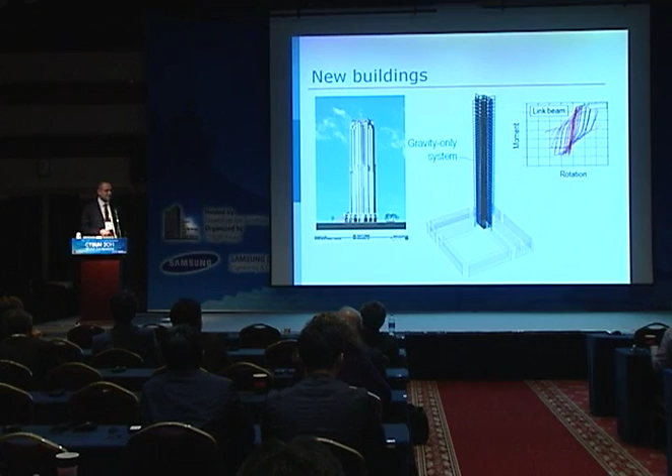The idea there was to start to really challenge the prescriptive language that was in the code, because it was recognized that the building designs that these prescriptive code languages were yielding weren't really user-friendly or architecture-friendly, or in fact, they didn't even perform very well from a seismic point of view.

So there was a series of guidelines that were developed in the late 2000s: the City of San Francisco, the Structural Engineers Association of Northern California, the Los Angeles Tall Buildings Council, and here you see the Council on Tall Buildings document in 2008 that was developed.

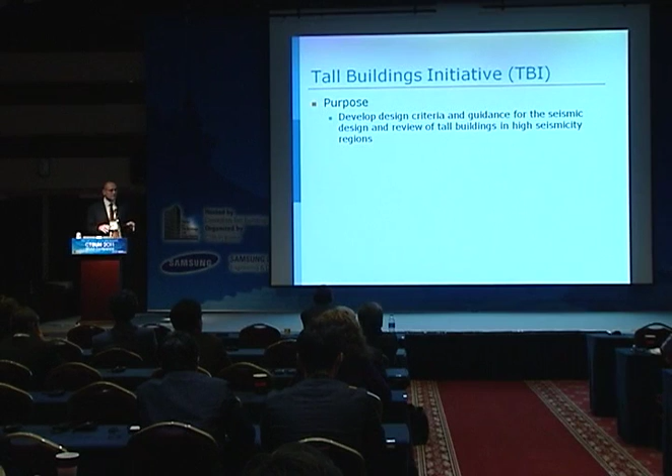The Tall Buildings Initiative was a funded effort, funded by a variety of organizations, but the idea was that there was this kind of mishmash of activity going on in the world with regard to the design of tall buildings in high seismic zones. There was a strong desire to pull this together into something more thoroughly thought through, so that there was a beginning and an end and a purpose and a storyline to be told in the design.

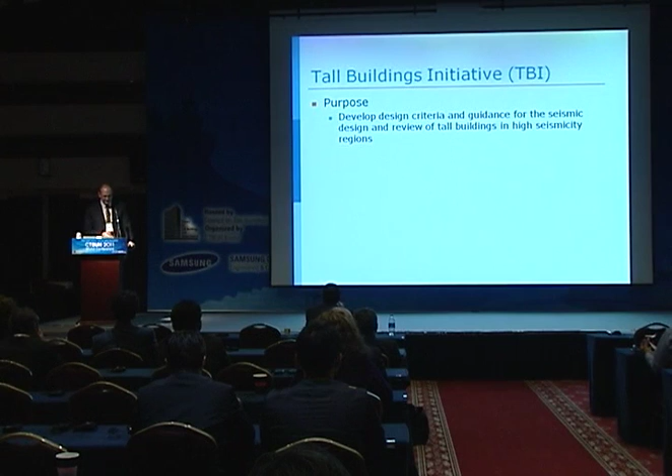At any rate, the contents of this particular guide here, you see the chapters from introductory comments, but then it gets into very specific definition of ground motions, preliminary design, service level evaluations, maximum considered earthquake evaluations, and the like.

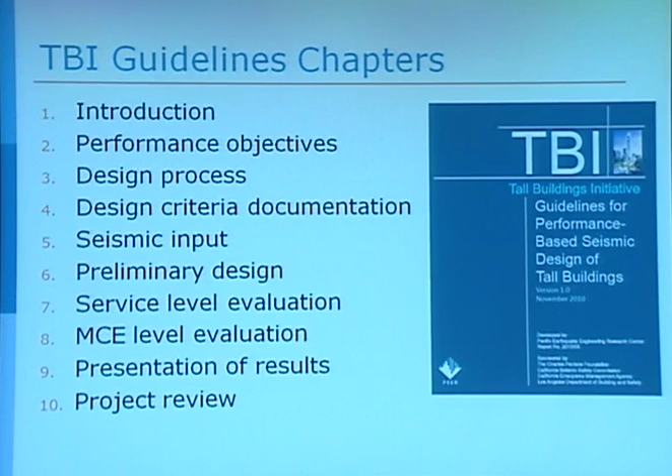Back in the 1990s, there was this fairly well-recognized table that was put together by the Structural Engineers Association in California, and it really kind of summarized the basis of the desire, if you will, what the building code was endeavoring to do.

As many of you know in North America, how the building code still is written is we're basically targeting a life-safe objective under a 500-year event. But because practice up until recently was unable to really go at this demand level very directly due to our constraints of analysis, et cetera, we'd take this demand level of 500 years, divide it by a response modification factor to bring it down to some elastic level that we could actually analyze and design our buildings with.

And the hope was that then through detailing, somehow magically, we would satisfy a service level criteria, and we'd also satisfy a collapse prevention criteria. It was really more of a hope and a prayer. It wasn't really a rigorously demonstrated performance. It was really more anecdotal performance, if you will.

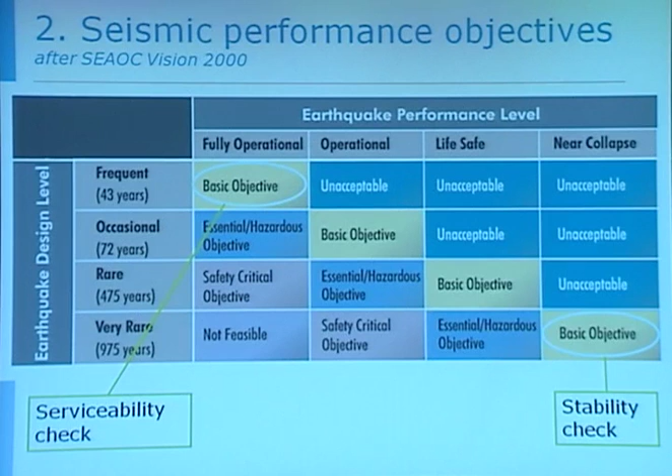Essentially we don't want the building to fall down. And what happens in between is really difficult, frankly, to assess and predict. So we focused on defining the demand levels and the acceptance criteria for these two bookends. And that's what this document defines in great detail.

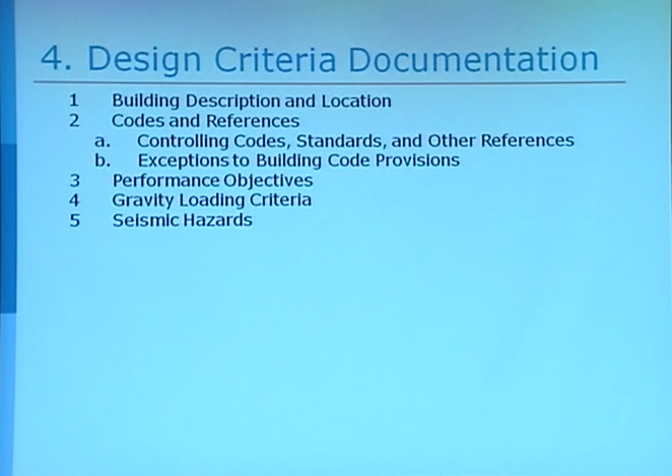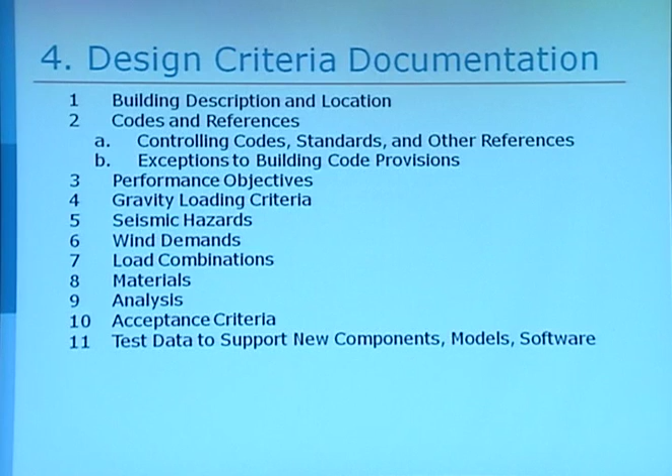One of the things that I'd say is actually fairly poorly done, frankly, in the engineering community, from my experience at least, is that when you go to design a building, to actually write down ahead of time what it is you're going to do in terms of your criteria, your procedure, your approach, and to actually communicate this not only to yourself and to your staff internally, but to communicate that to the external world, whether it's a building official or in many cases in tall buildings, peer review panel.

So included in this guideline are specific recommendations on what should be included in such a document. If you're going to communicate in particular to the outside world in the form of a peer review panel, what types of information should you include and how should it be organized and conveyed?

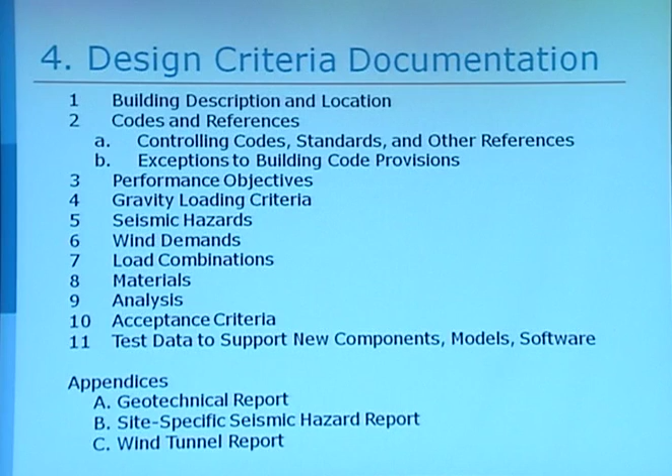Ground motion selection, of course, is really important. The recommendations given in this guideline suggest that when we're looking at tall buildings, as a minimum we ought to be considering a suite of 7 ground motions, particularly in nonlinear response history analysis, and that defining those ground motions should be done either via spectral matching or spectral scaling.

I caution everyone that there are hidden bumps in the road with both approaches, spectral matching and spectral scaling. If you do spectral matching, the question really is how much real variation in ground motion are you getting, and how well are you really testing your building? In spectral scaling, if you scale your spectra to the first mode period of your building, you may find great surprises in the second and third mode.

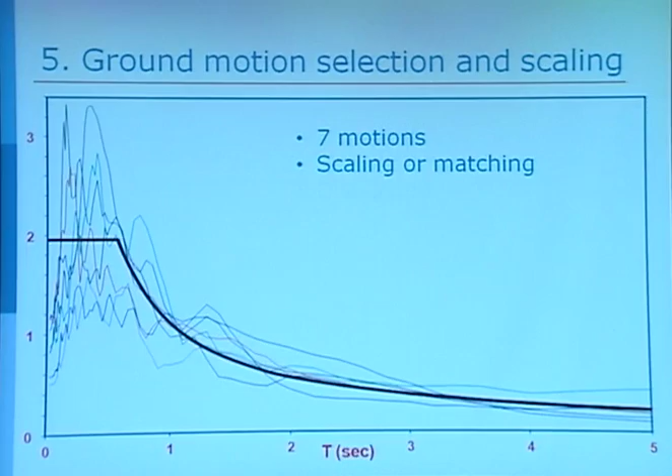The dispersion of the results is very important to consider and try to understand what that means to the detailing of your design. More recently, there's been a push to use what's called a conditional mean spectra approach, where you use suites of ground motions targeting your first 3 or 4 modes of vibration. This is a really interesting approach academically speaking. The difficulty is there isn't much historical design information to go by, so it's a bit experimental still at this stage.

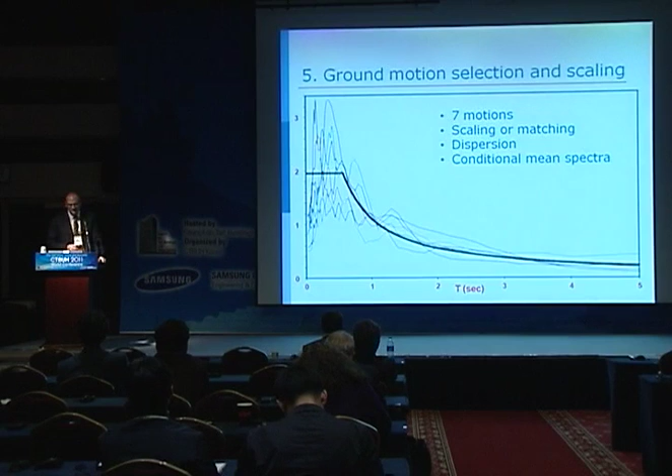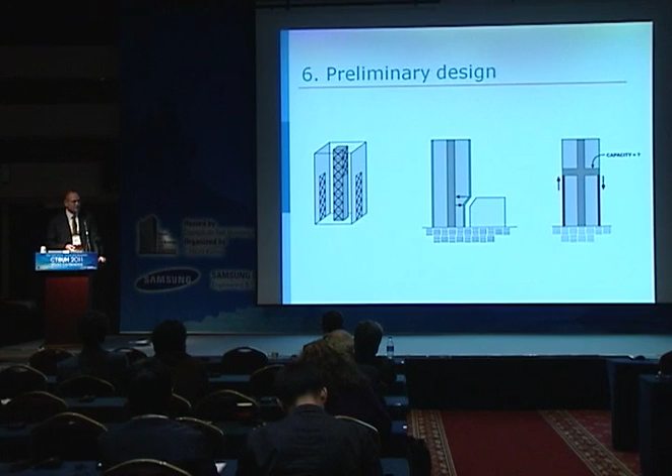The guideline then goes into some preliminary design suggestions, and in particular points out things that you should think about and be careful with. Our last presenter talked about outriggers. You see here in this particular diagram that remains a question, and you need to be particularly careful there.

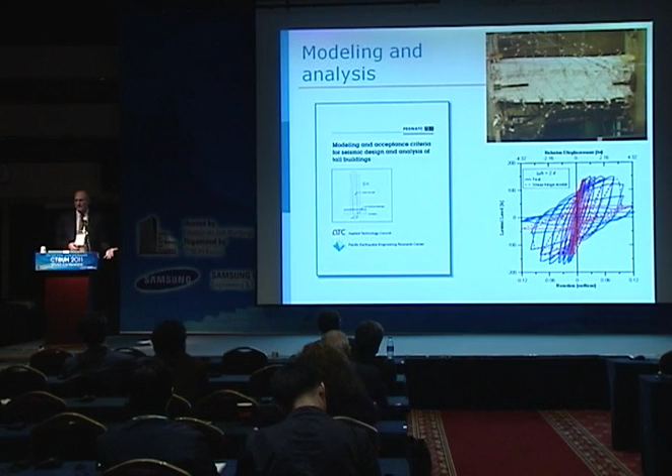The document also talks about modeling and analysis. It goes into great detail on how you should model the building, what should be included, what stiffness values should be assumed, et cetera. It's in great detail on how the model in fact should be built.

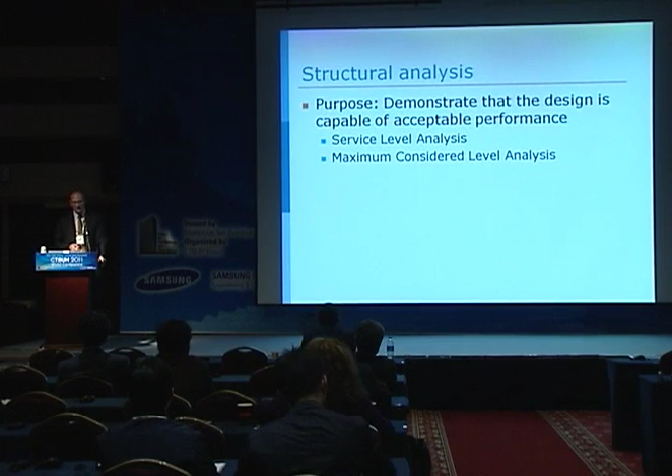When we get into the structural analysis, we're looking primarily at 2 levels, like I mentioned: a service level analysis and a maximum considered level analysis.

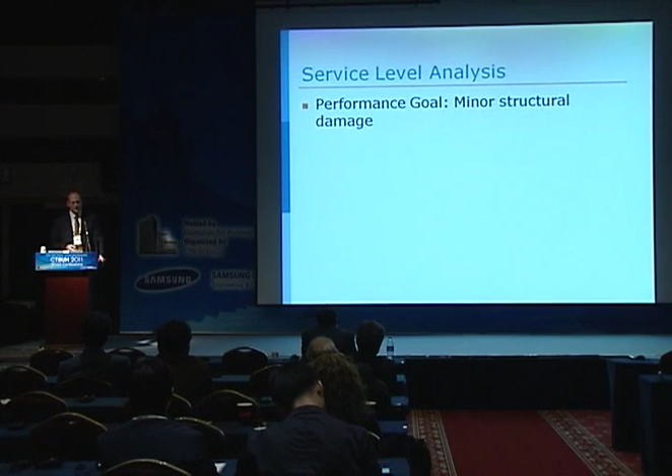At the service level, what we're seeking to do is really have little to no damage. The model should comprise all the components of the building, and again, we're modeling this to try and predict the actual response of the building. So unlike the past, where perhaps you were using design material properties and conservative assumptions in your model, at this stage of the game, we're trying to actually model what we expect the building will really do.

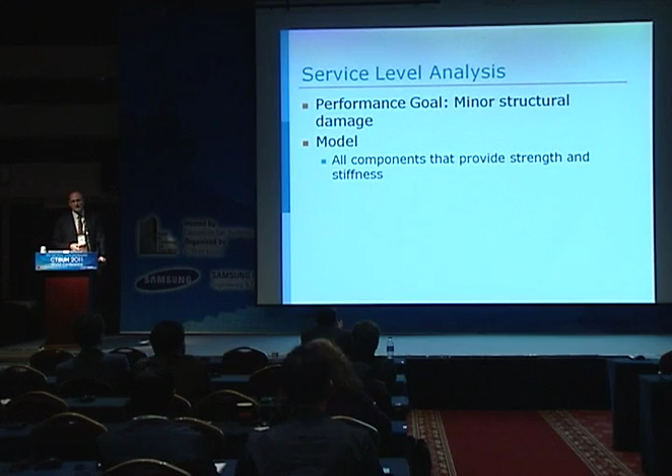For instance, instead of using design values for concrete strength, in the model you're actually putting in the expected material properties, not the design strengths. These are all detailed in this guide again.

There was great debate over what the demand level should be at the service level event. After probably 2 years of pushing and shoving and scratching and biting and complaining, et cetera, it was resolved at this moment in time that the guideline was only seeking to meet the intent of the building code, which is to have a serviceable building, defined as a 43-year return period event with 2.5% damping considered, noting that high-rise buildings inherently have a lower damping level than low-rise buildings. The acceptance criteria at the service level event is essentially elastic behavior.

We're looking for the buildings to respond in a very modest way and essentially remain elastic under this demand level.

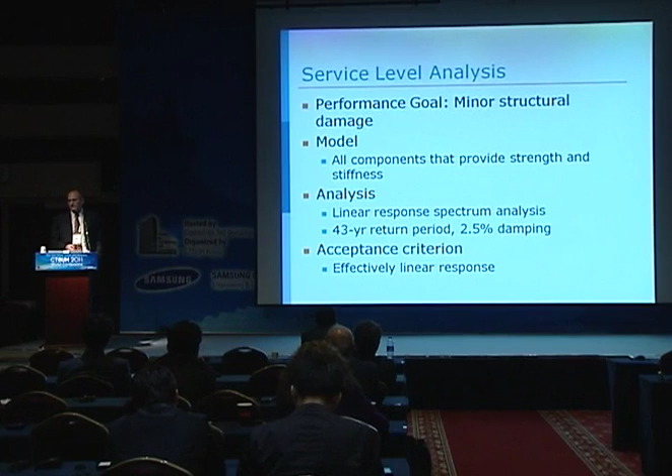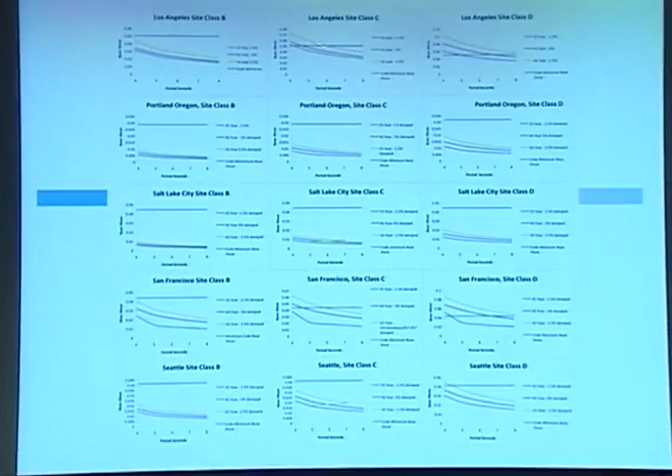One thing of note, and you probably can't read this, it's far too much data, but the intent of this slide is to point out that depending on the city you're in, the seismicity of that city, and the geotechnical conditions of your site, you may find, let's say in Los Angeles on a Class C site, these various lines represent different return periods. The horizontal line represents the traditional minimum code base shear. By and large, what we're defining as the demand levels for the service level event and the old code values are very similar to one another.

As opposed to if you're in, say, Salt Lake City or Portland, Oregon, where the traditional code minimum base shear is actually substantially higher than the ground motions predicted that are site-specific.

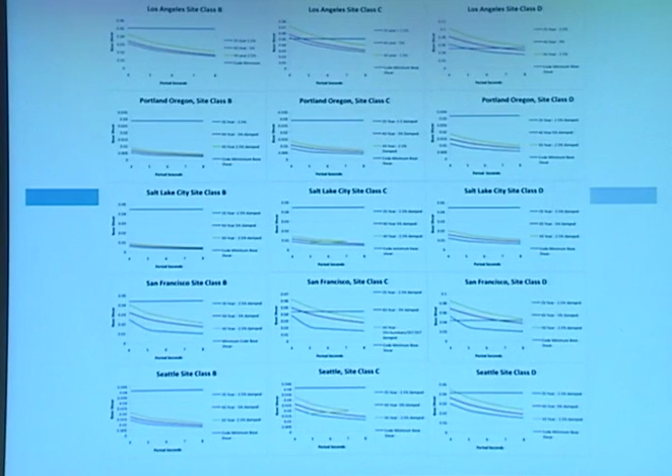This might lead you down a path of saying, well, that's great, I can design a more efficient, more economical building. The problem is that, for instance, in Salt Lake City, the maximum considered event is substantial. So the gap between the service level event and the maximum considered event is much greater than it is, say, in Los Angeles. If you solely spend your time thinking about the service level event, you will likely get surprised later when you try to demonstrate your building doesn't collapse under substantial ground motions.

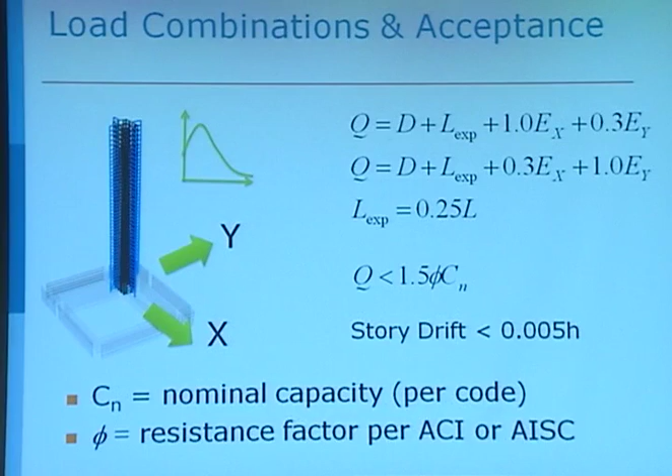Load combinations, I'll probably skip over this for the moment. Let's move on to the maximum considered event. Once again, here what we're trying to do is demonstrate that our designs perform in a way that there is little chance that they collapse or have even partial collapse under this maximum considered event.

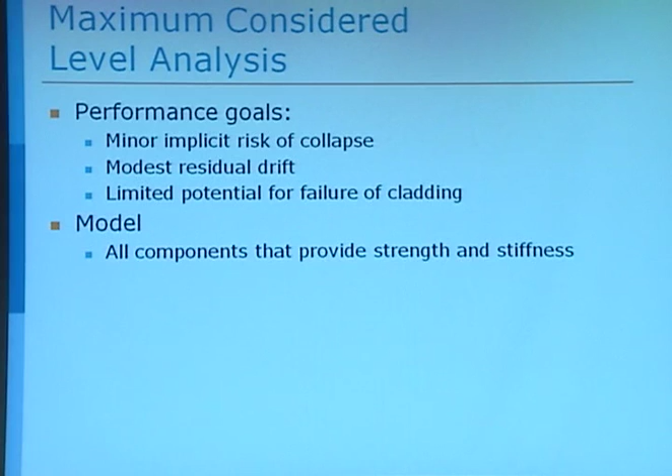In most cases, that maximum considered event is considered to be a 2,500-year return period. We're modeling all the components of the building. The analysis is generally done as a nonlinear dynamic analysis with this suite of 7 ground motions. As an acceptance criteria, we've defined 2 classes of elements: force-controlled elements and deformation-controlled elements. Deformation-controlled elements are those that deform and respond in a very ductile way, like beams in bending. Force-controlled elements, say axial load in columns or shear in shear walls, are things that when they break, bad things happen. We want to protect against those.

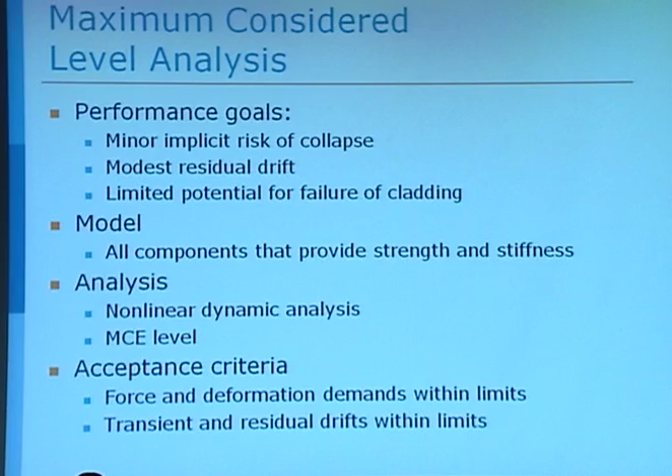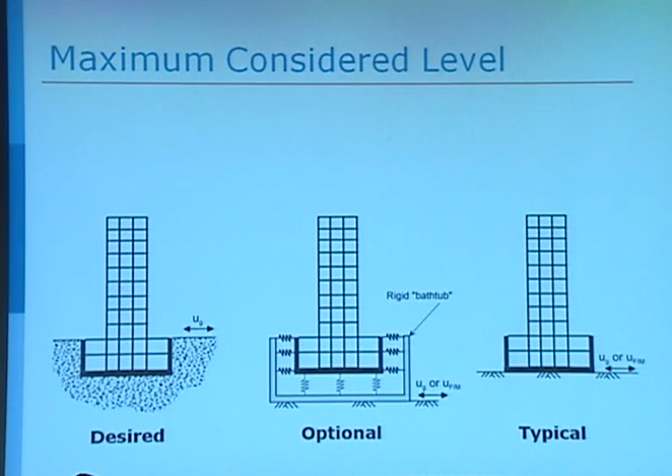We also talk in great detail in this document about soil structure interaction and how this should be treated. You can see on the left that would be the desired model where we include the soil continuum, but it's very difficult to do analytically. What's typically done is on the far right. But we're doing all this in a 3-dimensional nonlinear response history. What we've come down with in this report, or in the guidelines, is that soil structure interaction, while it is permitted, is not required.

Now, that said, this document was written for a class of buildings that were probably in the 40, 50, 60 story range. I think we'd all agree if we're talking about buildings that are 800 meters or 1,000 meters, soil structure interaction becomes a far more important thing to think about.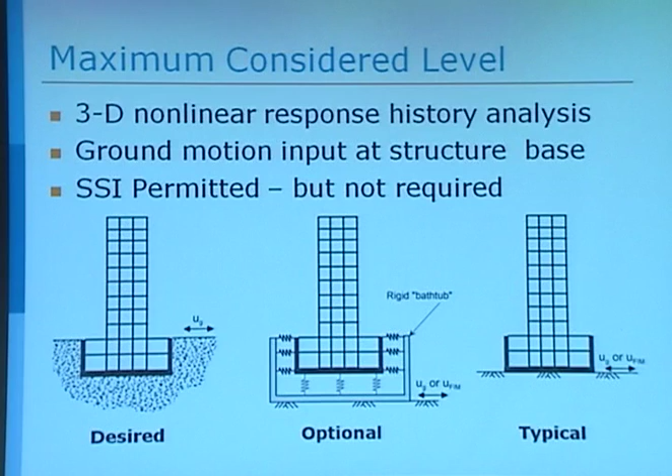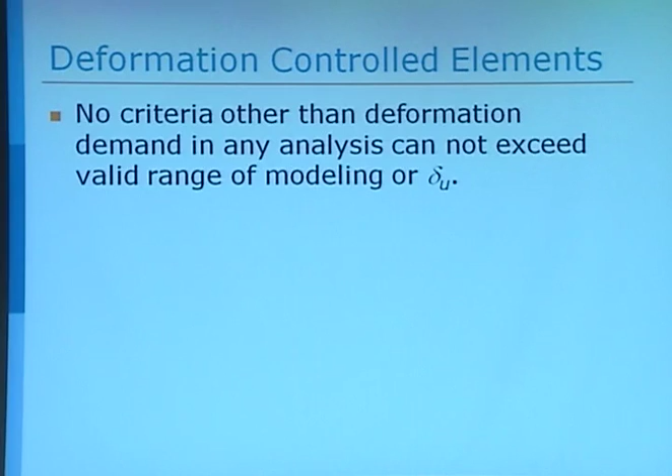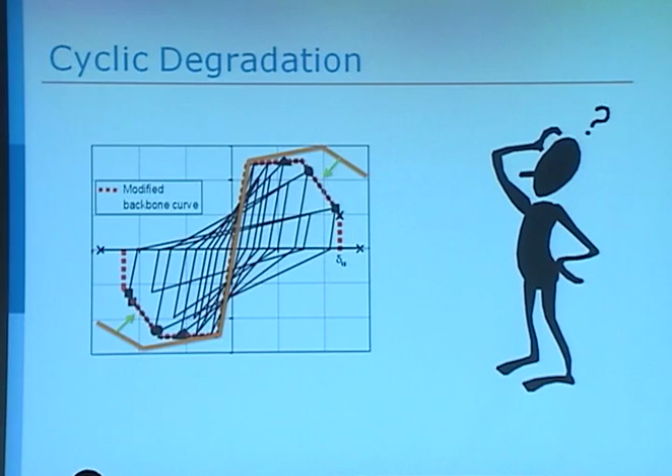So under deformation-controlled elements, considering those from an acceptance criteria point of view, there is no criteria or imposed limits on those items other than to say that they should stay well short of their maximum fracture demand level. One item that remains a ponderance, something we are still scratching our heads over, is cyclical degradation of elements, in particular how elements such as shear walls degrade in shear and how to model that. It's a subject that deserves a lot more attention and research.

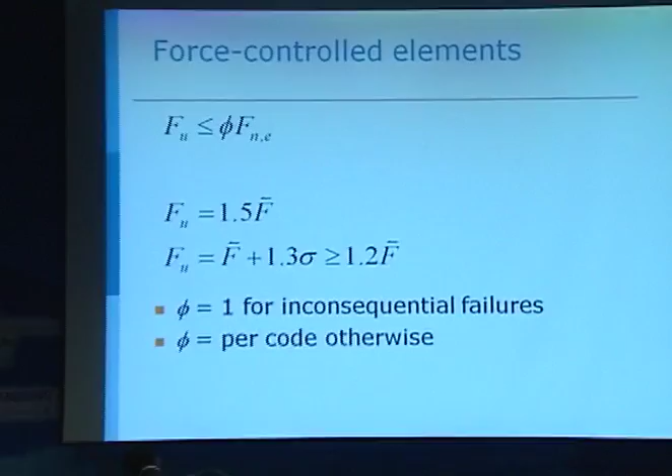For force-controlled elements, it's really important to point out that what we're talking about is we run this series of 7 time histories, and then what we're comparing is 1.5 times the median, or 1.5 times the mean response, against the capacity of the elements. So it's a substantial demand on these elements. It's 7 time histories run at the maximum considered event, and then we're taking 1.5 times the median or mean response level predicted to evaluate whether or not those elements are acceptable.

We talk about residual drift and transient drift, and I have a whole other chapter to the discussion here. I'm going to leave that for a future presentation.

The point being that with these guidelines, we've actually done a detailed assessment with sample designs. There were designs prepared by several engineering firms on the West Coast using these guidelines and using several others to benchmark the results. All of that information is available for you if you want to go and get this document off the web.

If you go to a website that is peer, P-E-E-R, peer.berkeley.edu, this document is available for free, as well as all the backup reports and the sample designs. So this is an excellent resource.

Like I said, it's North American focused, and the next step in this evolving landscape is to engage the rest of our colleagues around the Pacific Rim in particular, and bring that together in Shanghai next year, after which we'll have a more global report and a more international high watermark for seismic design in tall buildings. Thank you.